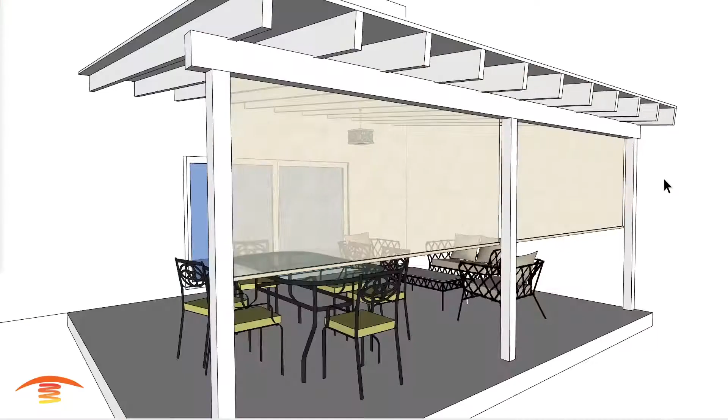All right, so here we have this residential application, and I took it upon myself to put some furniture in here. I'm sure this is not how the furniture will be lined up, but just to give an example of how the heat will be distributed within this area. So let's go ahead and just take a look at what we have here. First of all, we'll go for the overall dimensions that we have here.

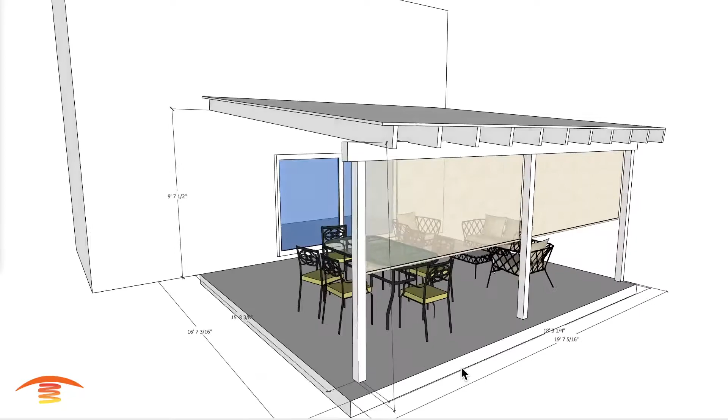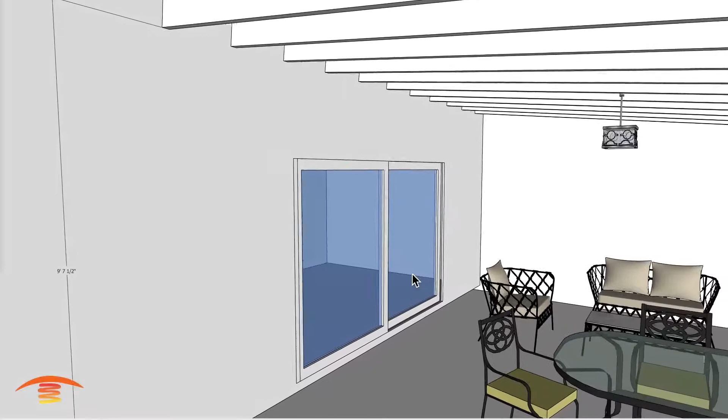You can see that it's about 16 feet, 15.8 to the center of the post, by 19 or 18.5 to the center. And then you can see we have a slope ceiling here, 8 feet on this side, and I have it at 9 foot 7.5 on this side to the bottom edge of these joists here. So anything else? We do have this lamp in the center and a doorway that is a sliding doorway. Okay, and let's see if there's anything else. I think that's about it, so let's turn that off.

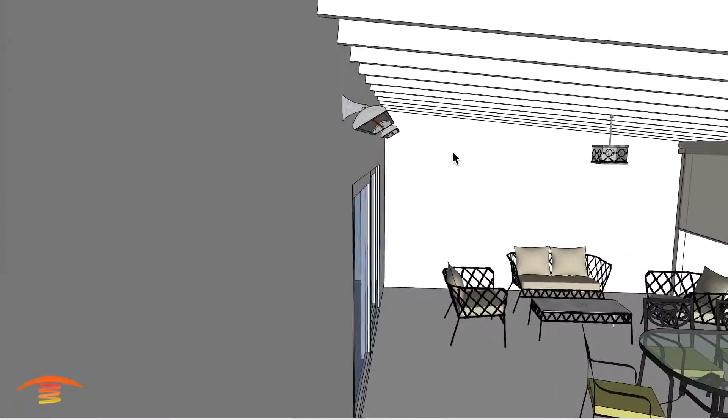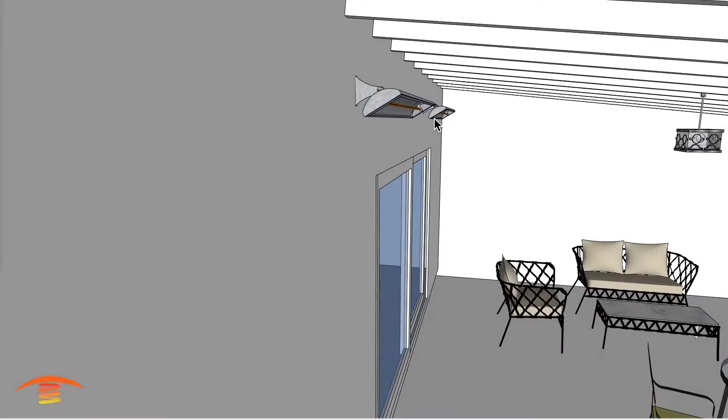So the first thing I'm going to show you is the customer contacted us stating that they were informed that the best position might be placing it on the wall, or maybe even that the customer thought this was the best position and then they agreed with him or her. So in any case, this would be the position that you would place a C-series model. I got it at a 4,000 watt unit. You'd probably want a 6,000 watt unit if you're going to do this.

And I should also state that the customer stated that they want just the outside area or half of this patio heated. They're not really interested in heating the inside area here at all. That's my understanding, so that's what we're going to kind of do.

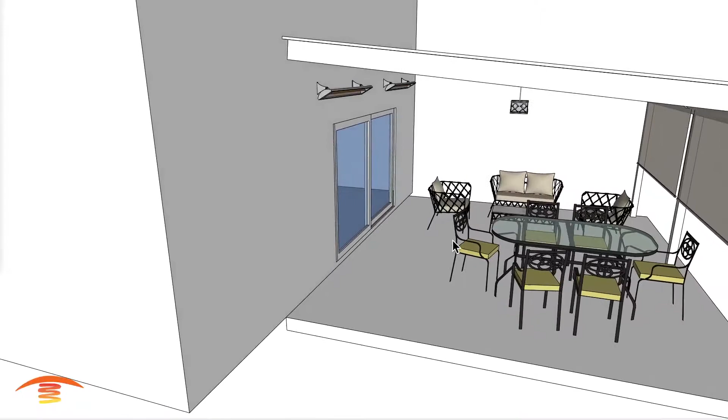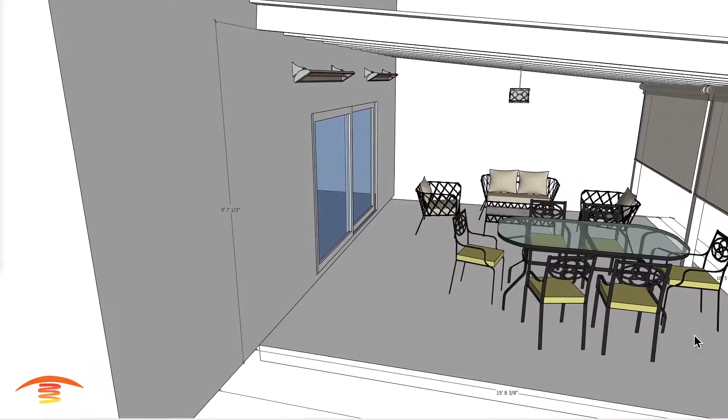But if you were to place a heater here and then expect a throw of this 15 foot, 16 foot throw, you're not going to receive anything out here in this section of the patio. You're not going to get any heat, even if you put the 6,000 watt unit out here and possibly change this angle to, let's say, a 40-50 degree tilt, so you got more heat coming out this direction.

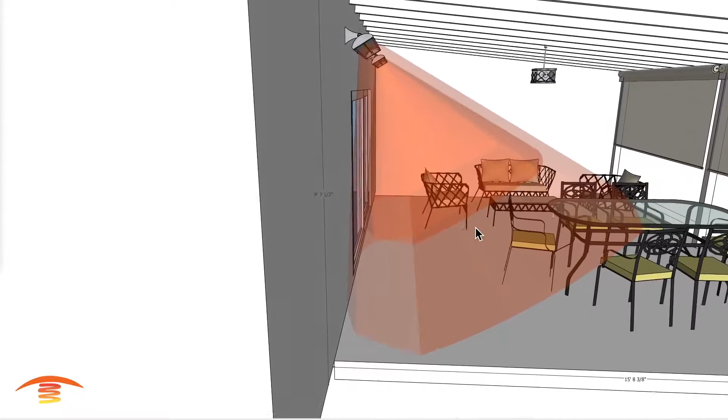These heaters have a heat ray that is designed for a specific height, and no matter if it's angled or not, that height or distance doesn't really change. And so a 4,000 watt would really be a nice application for, let's say, an 8 to 9 foot elevation, and the throw is only going to be about 8 to 9 foot from the center position out.

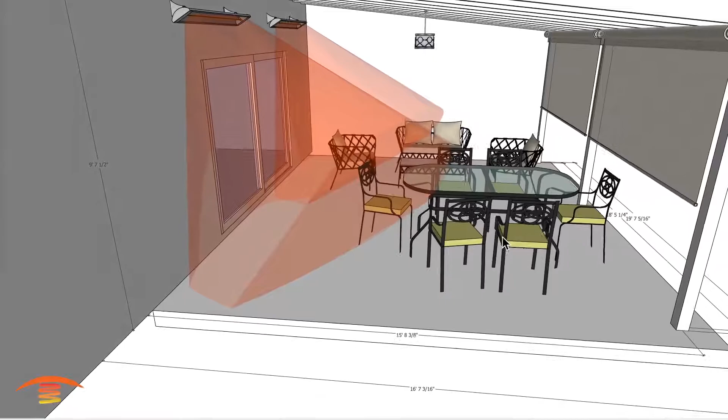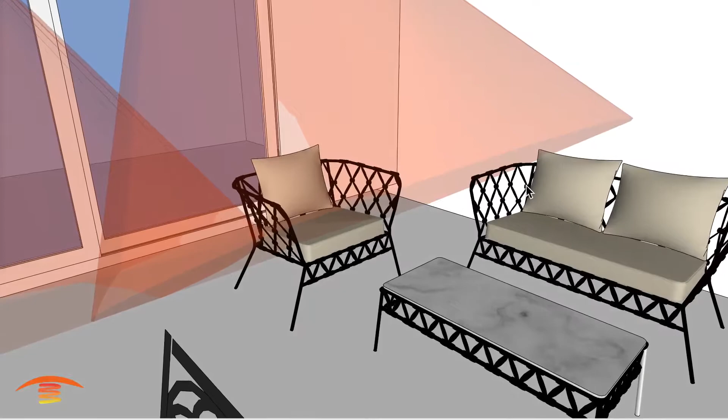So in this scenario here, if you had a table similar to this, which actually extends beyond the halfway point of this patio, you're going to heat up this area here and this area here and maybe this edge of the chair here. Now you can see, if I show you this, that we're not really even in that optimum amount of heat for this model here. This is a 4,000 watt unit. Now this could be a slimline or the C series or the W series, doesn't really matter.

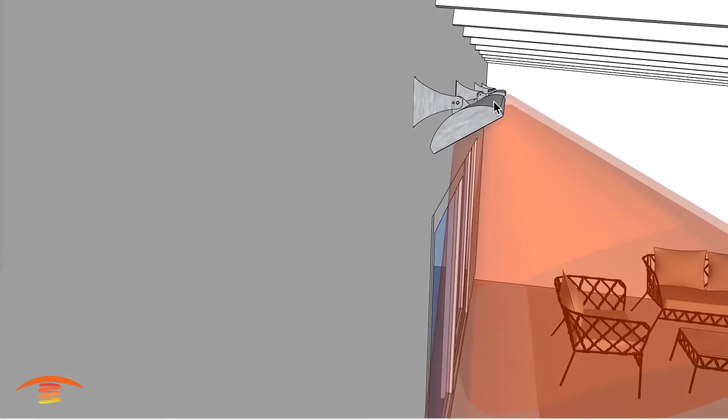Also, just a side note that for the heater on a wall mount, they've adjusted the height requirement for above. Now it is 12 inches when it's mounted on a wall, so just keep that in mind. All right, so this is not my ideal application, and I would never suggest this, especially for somebody that wants to heat up the outer edge of the patio. So let's just turn that off.

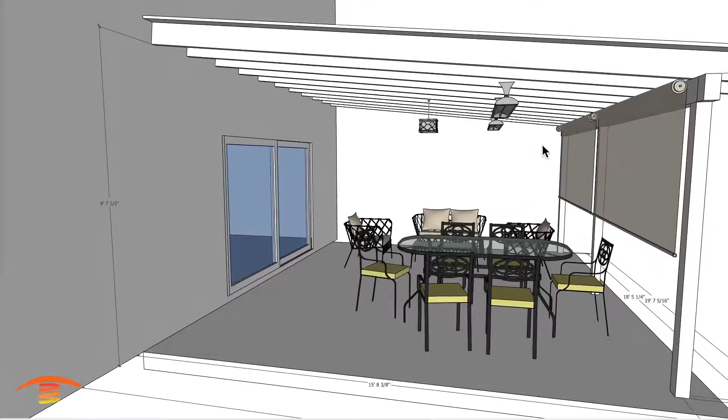And let's go ahead and look at what I would suggest. I would suggest something more in line of this style of a heat system, especially if you're just looking to heat up this outer edge.

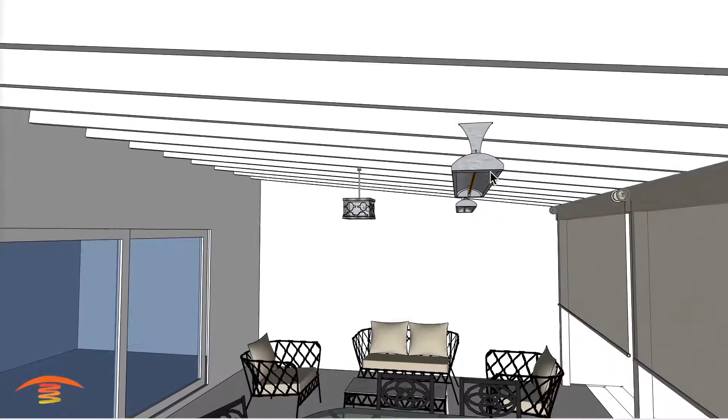So what I have here is these are 4,000 watt units, again, the C series. You can go with the Slimline series. The reason you might wish to go with the Slimline series is it is a lower profile of a unit. So the side profile is really 3x5. This is 8x3.5 roughly, and those dimensions are general.

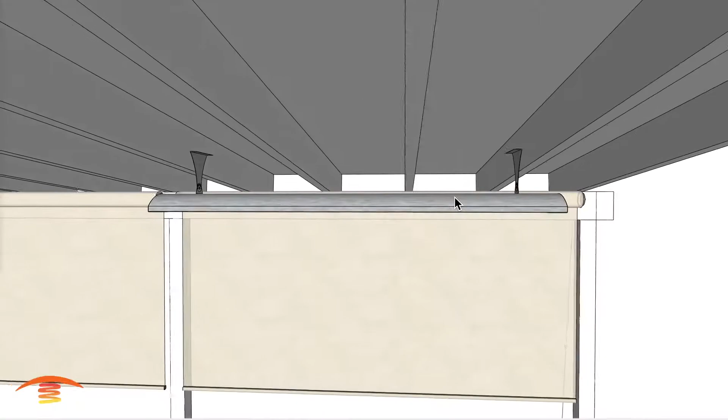But the nice thing about the Slimline is that these brackets will move along a track on the Slimline series, so that you can attach it to these rafters here as you see fit. You may need to bring one over, something of that nature, or just connect the two in here. But that might just line up with your existing structure much better.

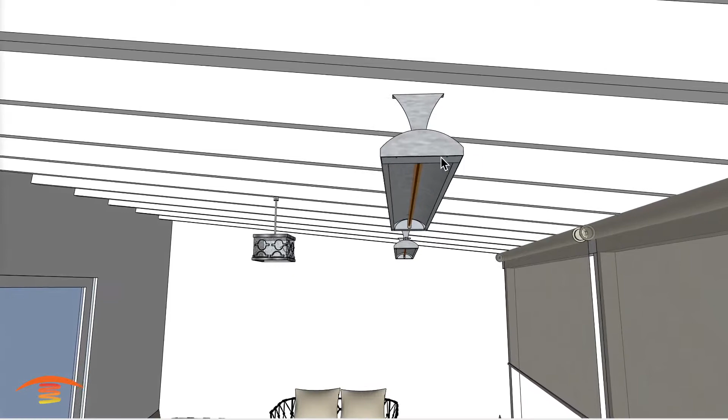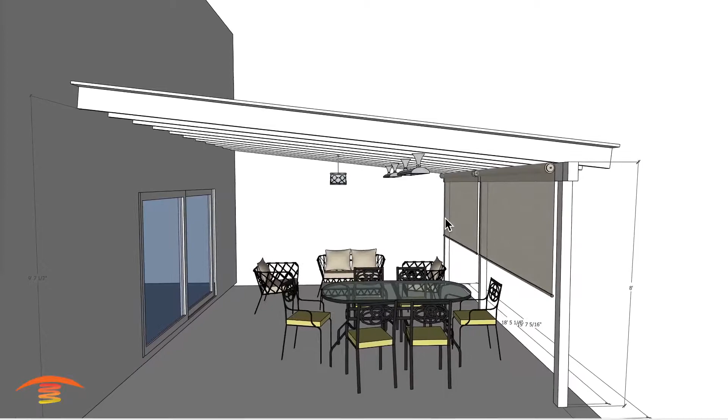With a 4,000. Now, if you decided to go with a 6,000 watt unit, then it's only available in the CD series and the WD series. So there's a CD and a WD 6024 as the model numbers for that. Now, would I recommend a 6,000 watt unit? No, not at this height.

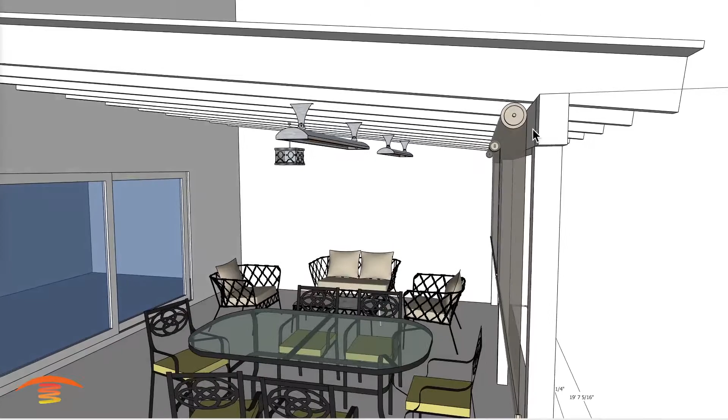The final height here is just about the same height of this, which is 8 feet off the ground. We have the 6 inches of clearance. We're pointing the heater straight to the ground, and I have this actually centered here to this edge at 4 feet. You might also notice that they have a drape or a blind that comes down here, so we want to keep away from that as well. Shade, I should say. I believe that's what that is.

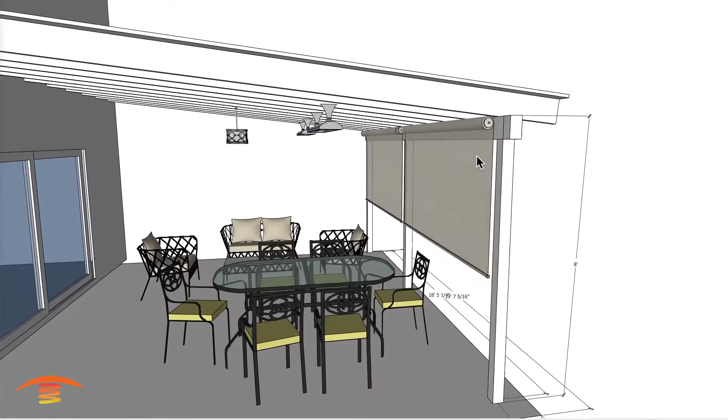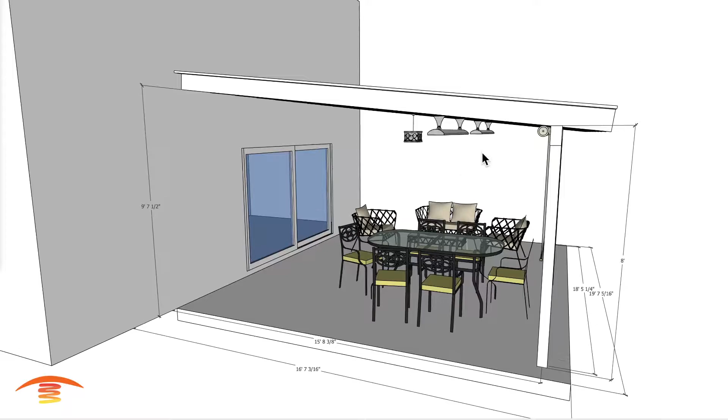So center of heater 4 feet out from this edge of this beam, and that should give you a good footprint of heat, 4,000 watt. And then if you wanted to put a control system on there and have some extra heat for those very cold days, then I would go with the 6,000 watt. And I believe this is in a Southern California area, so the winter temperatures are pretty moderate compared to other parts of the country.

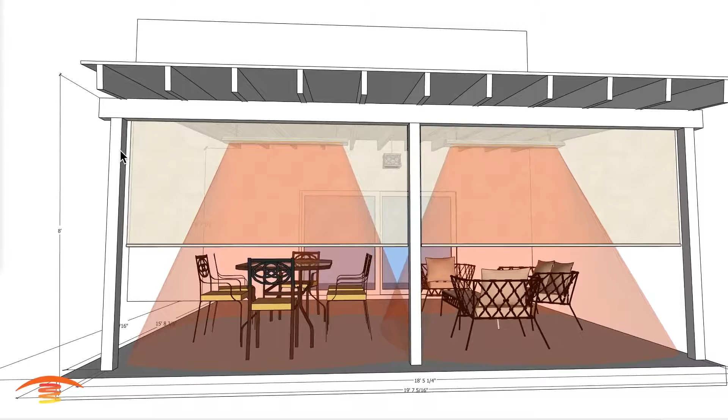So let's go ahead and look at the footprint of heat. Footprint of heat is covering the space fairly well. We got about a foot of overlap between the two heaters, and by the way, I do have them just centered within these posts here. So the center of the heater, center of the post here, and true with both units, 4 feet off.

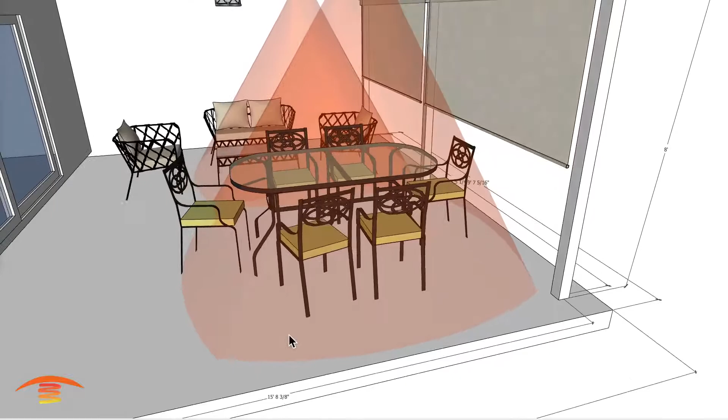You can see that we have a nice foot of overlapping here in the center, and we're not quite getting a good coverage on these edges, but if you're utilizing the edge, then I think this will be the cooler spot here as far as seating is concerned. And so with a layout like this, again, if you intend on placing more seating area or arrangement out here, more than half of the patio itself, then you really need to consider doing something additional.

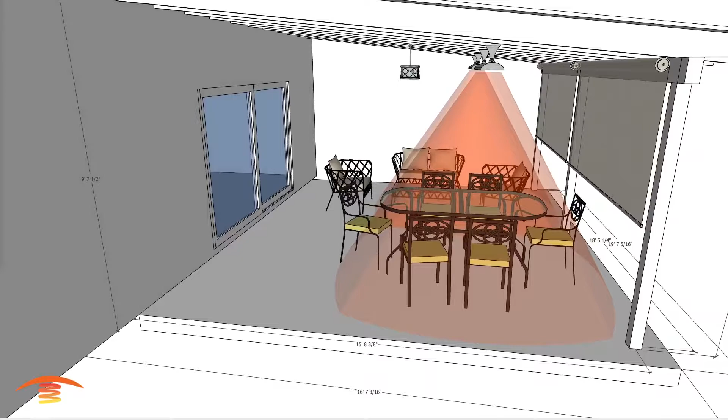That additional would be something of this nature, where you'd place 2 more units 4 feet off of this wall. We got some really good overlapping here, so this would be a warm area. You may not even need that 6,000 watt unit for this space right here.

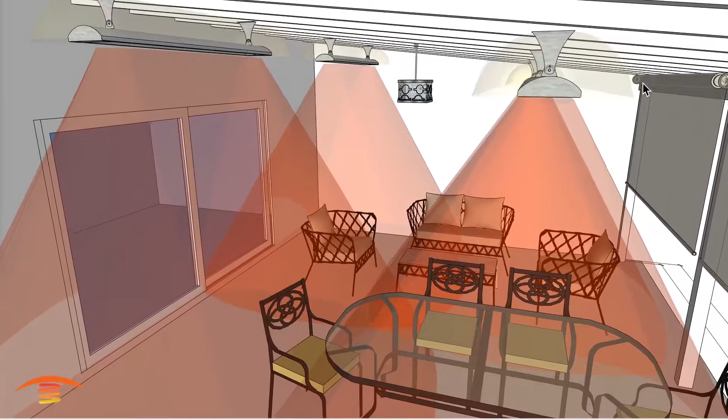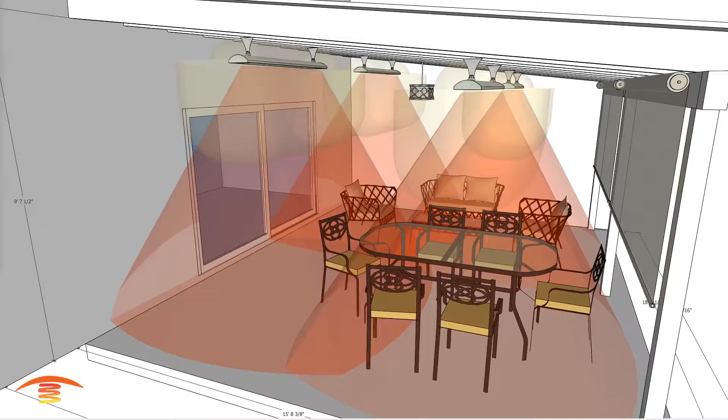And also, just another side note, clearances: we're meeting clearances when you point it down to the ground. It's 6 inches all the way around, and then it's also, of course, 18 inches from the bottom side of the heater all the way around, and 36 inches down to any combustible down here. So there you go. There's the different applications you can use for this specific property. Let me turn this off here, turn that off, and turn that off there.